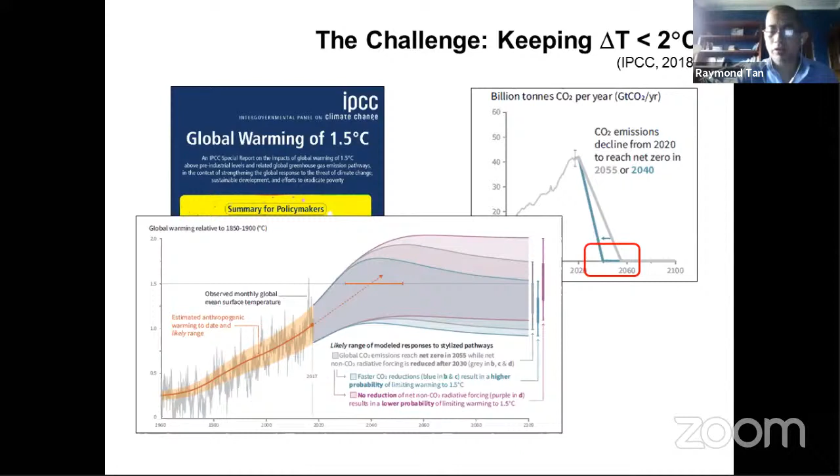It's such a major challenge that researchers, for example Haszeldine and colleagues, wrote a paper two years ago saying that these deep emissions cuts will only be possible with the large-scale use of carbon capture and storage technologies and carbon dioxide removal, as it's called by the IPCC, or negative emissions technologies. Essentially that means we would need to accelerate the commercialization of these technologies, which are still at pilot plant or lab scale, or even just conceptual scale as we speak now.

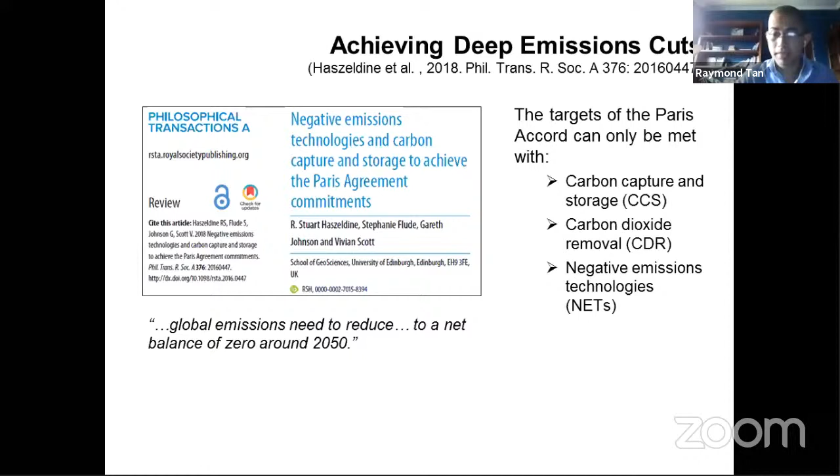What we actually need to stabilize climate is to go in the opposite direction, to get to zero by 2050. It stands to reason that rather than assuming there's one silver bullet that will allow this drastic cut to be achieved, it's probably more realistic to assume we would need to pick different technologies and maximize their use, getting cumulative emissions reductions by combining all of them wherever suitable, based on geographic or economic conditions. With optimal deployment of technologies like CCS, energy efficiency enhancements in industry, buildings and houses, improvement of fuel efficiency, and negative emissions technologies, all put together they can potentially be scaled up to achieve zero emissions by 2050.

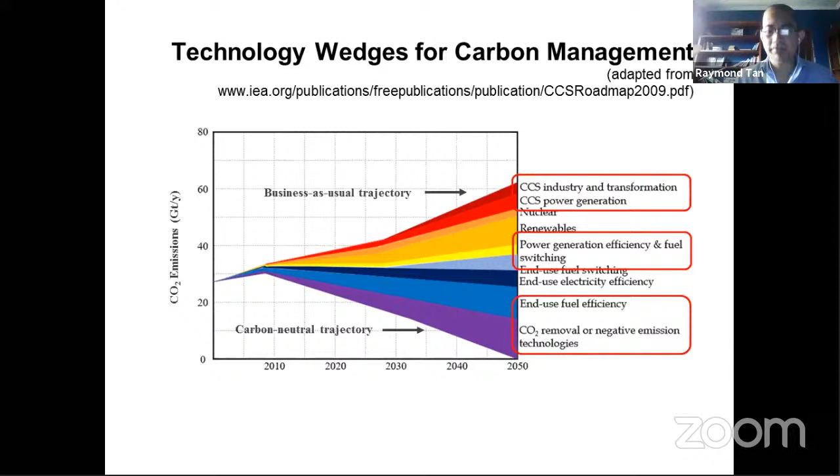All right, so that is the background as far as climate change is concerned. I'm going to talk about carbon emissions pinch analysis, or CEPA. This is a modeling framework for optimal carbon-constrained allocation of energy streams, matching them with different energy demands or energy sinks, given that each of the sinks will have carbon constraints.

This is a modeling framework that can be applied at different scales, ranging from an industrial plant to an entire country, or even a cluster of countries like the EU or Southeast Asia. And I will stress one thing: CEPA is a modeling framework. This is best explained by referring, for example, to the SEIR models, which have become very popular nowadays in pandemic modeling. There is a difference between a modeling framework, which is like a template for computations, as opposed to a specific working model.

What you do is, if you have a modeling framework, you start populating it with numerical values of case-specific coefficients, and then you have a working model. So what CEPA actually is, is a modeling framework, and you can use it in different contexts by just using the appropriate numbers. So this is more about how to calculate rather than the specific results of the calculations.

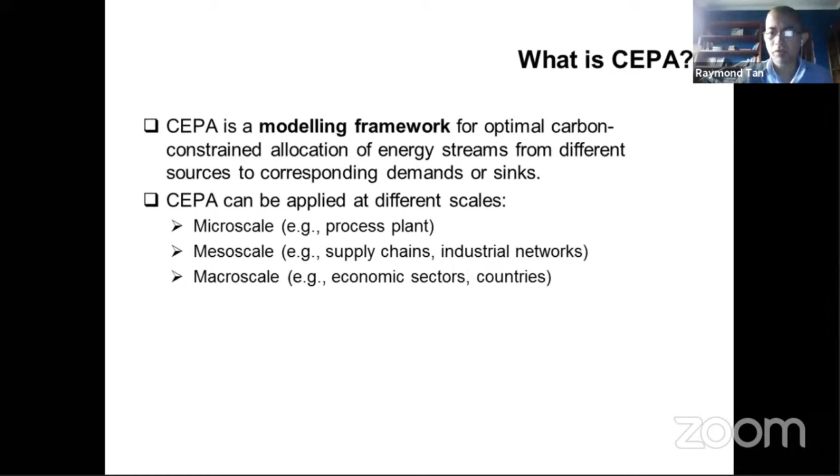The genesis of CEPA can be traced back to chemical engineering. I am a chemical engineer by training, and one thing I was never taught back in my university days is something I can say in just a few seconds: chemical engineering is engineering for the mass production of chemicals. That is the fundamental problem we all face. Chemical engineering is called engineering simply because the problem of mass production involves not just forming a specific molecule, which is your product.

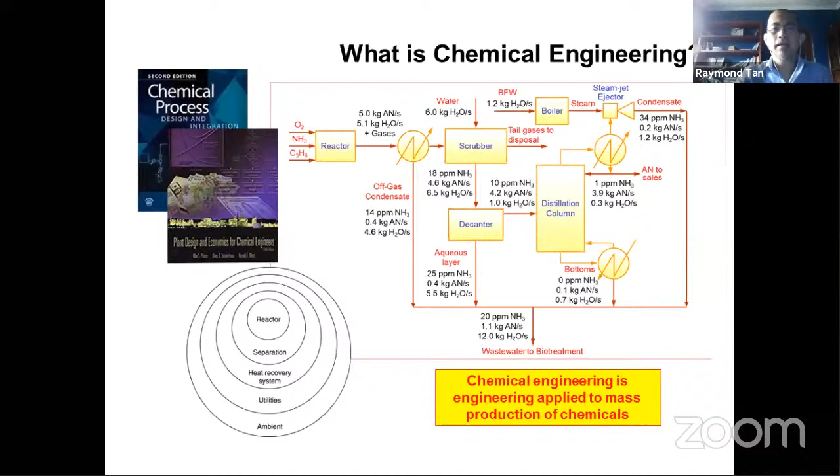Think, for example, if you're making ethanol. When you mass produce, it's also essential that you have all of these purification steps, because you need to purify the product to a certain level of quality required by the market. And when you have all of these purification steps, you have what are called utilities, because you need energy and water to ensure these various preliminary steps at the core of the process are able to be done on a large scale. So energy is a major factor in industrial plants, as is the use of water streams and such. Because of the need for utilities, one branch of chemical engineering known as process integration emerged back in the 1970s.

For those of you old enough to have been alive back in the 1970s, one of the major changes was there were a couple of energy crises, one in 1973 and the other in 1979. There was a sudden jump in the global price of energy, which acted as impetus for industrial plants and energy intensive companies to look for ways to economize on a major business cost, which is fuel cost. So process integration was a branch of chemical engineering dedicated to developing design tools or algorithms to allow companies to either build more efficient plants or modify existing plants so they consume less fuel. This was in the 1970s.

In the ensuing decades, there's been plenty of progress towards applying those same principles. If you can save on fuel, just by modifying those principles, you could potentially save on other things your plants need, whether it's water, solvents, or even some people have used these principles for optimizing the flow of financial resources.

In process integration, the major methodologies which emerged were initially seen as being competitors. One is pinch analysis, which is based on the use of insights and simple graphical displays, similar to what economists would use for reasoning. On the other hand, you'd have groups working with mathematical programming, which are equation-based models, which once you get to tens of thousands of equations, might actually be quite black box in nature. Fortunately, in recent years, these two schools of thought have made friends with each other, and there's been more synergy in the research community.

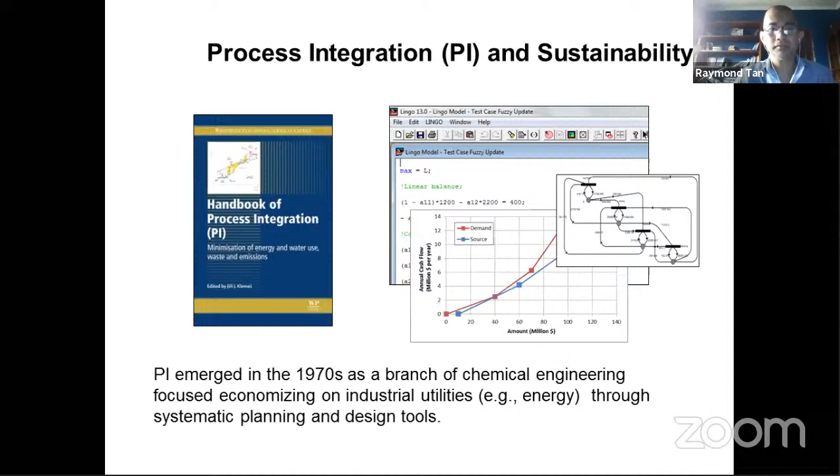Now, in pinch analysis specifically, the general roadmap is we begin with what is known as a process flow diagram, which is a schematic representation of an industrial plant. Pinch analysts would extract highlights of the data that are needed. For example, if you're dealing with energy conservation, you would probably need temperature data and enthalpy data.

And we construct what are known as composite curves, which summarize the cumulative demands of energy and cumulative supply that are available inside the plant. The pinch analysis procedure culminates in what is called network design.

In other words, you then map out if there are pockets of excess energy in the industrial plant. These are matched with the appropriate pockets of energy demands internally, because if you can use waste energy available in your plant to supply demands inside the plant, you can buy less fuel and you would in fact save on costs. You would actually reduce emissions. This was recognized back in the early 90s, that there's a link between emissions reduction and fuel consumption reduction.

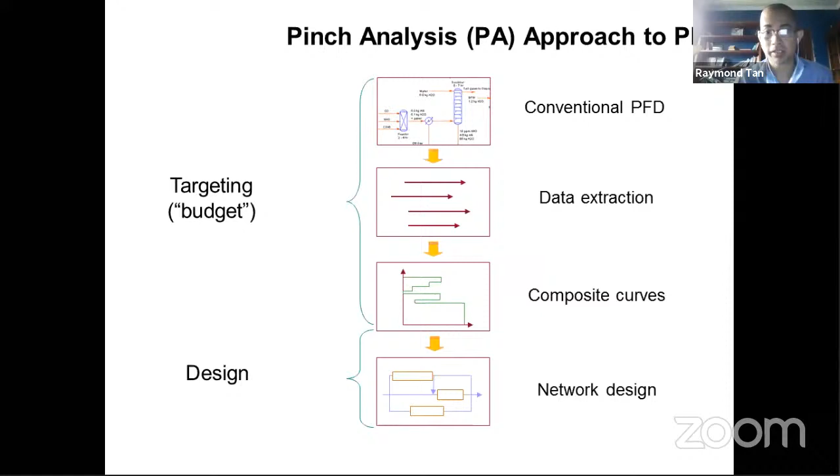What we did essentially in our article, which has also been rehashed in the Handbook of Process Integration and in encyclopedias, is we've taken the general principles of pinch analysis, and instead of applying them to energy conservation, we applied them to a specific problem of matching energy sources with energy demands based on carbon emissions considerations.

We never really thought, between the two of us, that it would get this big 15 years later. The seminal paper has been cited over 200 times. Those papers which cited us have cumulatively had about 5,000 citations and growing by the day.

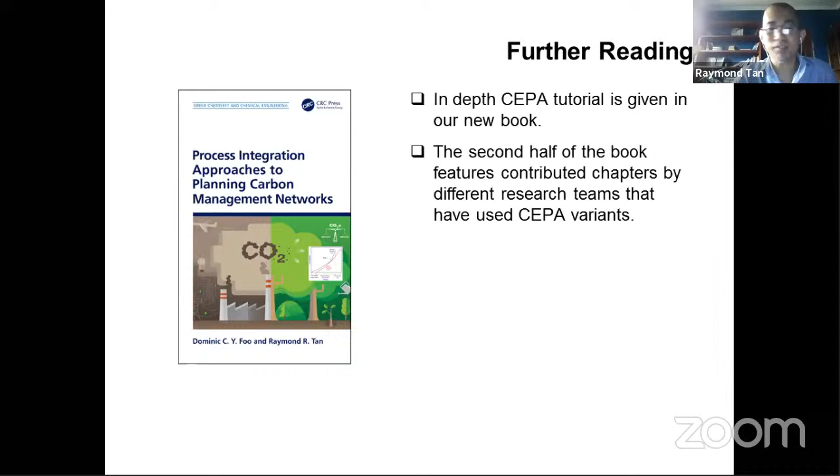At the demand side, we would have similar data: how much does each of the sinks require in terms of energy, and does it have a carbon emissions cap? Based on this information, we would then match the sources in the sinks.

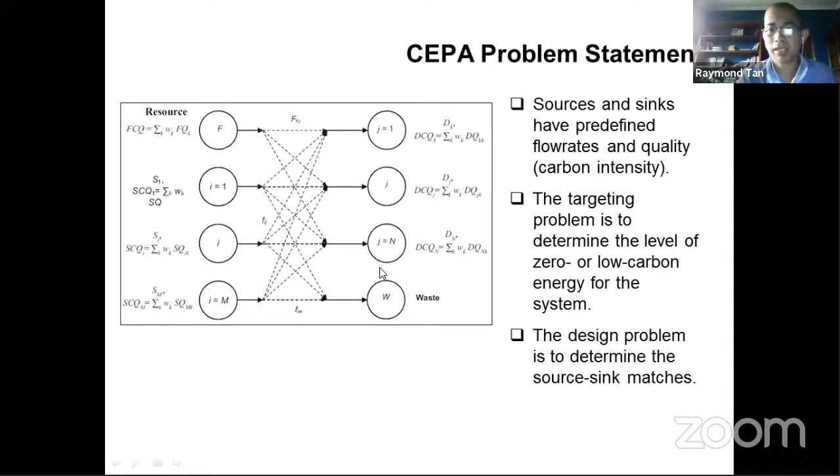Typically in pinch analysis, we would have what we call the fresh resource. That means there's a very clean energy source which is potentially available, let's say solar energy or wind energy. But what you're trying to do is make the most of what's already existing as energy sources, while satisfying all of the demands in terms of energy flow and in terms of carbon caps. So that is the fundamental problem.

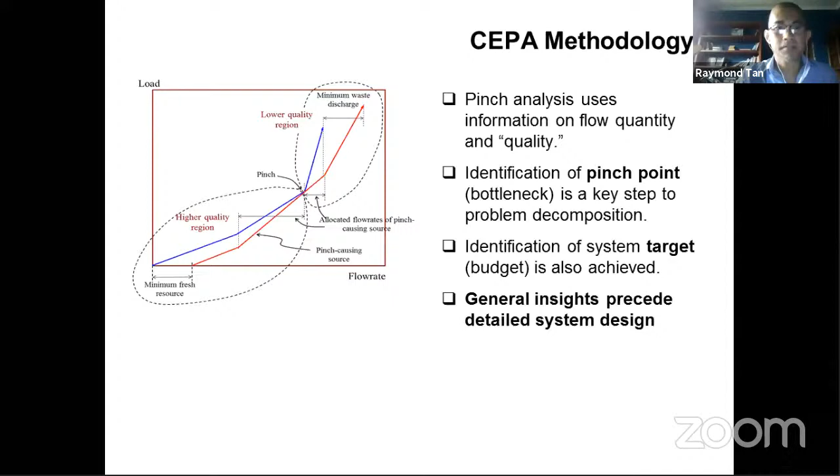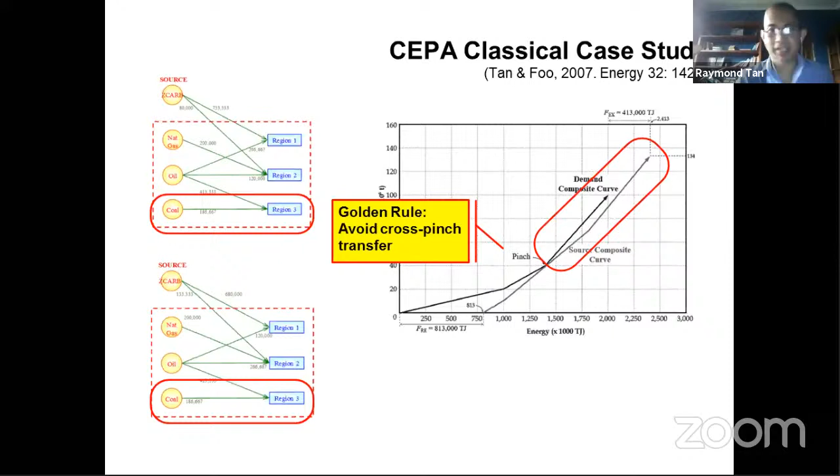So that is the golden rule of pinch, and that is what CEPA does. The same procedure, the graphical display, is very useful for discussion, education, and communication purposes, but we've actually taken up these same principles and implemented them as an algebraic algorithm and as a mathematical program in subsequent papers published a little bit more than a decade ago.

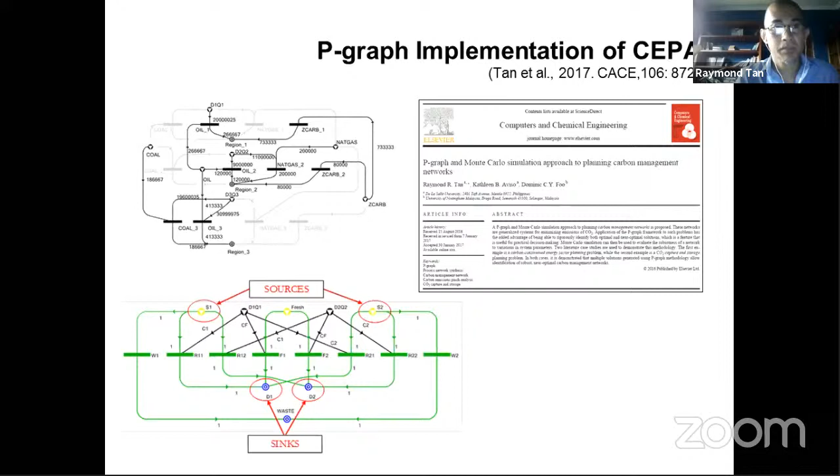We've also much more recently used process graph algorithms to implement carbon emissions pinch analysis with some interesting results. We've also applied exactly the same principles, but measured how sustainable an energy source is, typically using carbon emissions, though you could use other metrics as well, like land footprint, water footprint, and others. So applying pinch principles but replacing carbon footprint with some other footprint appears to work.

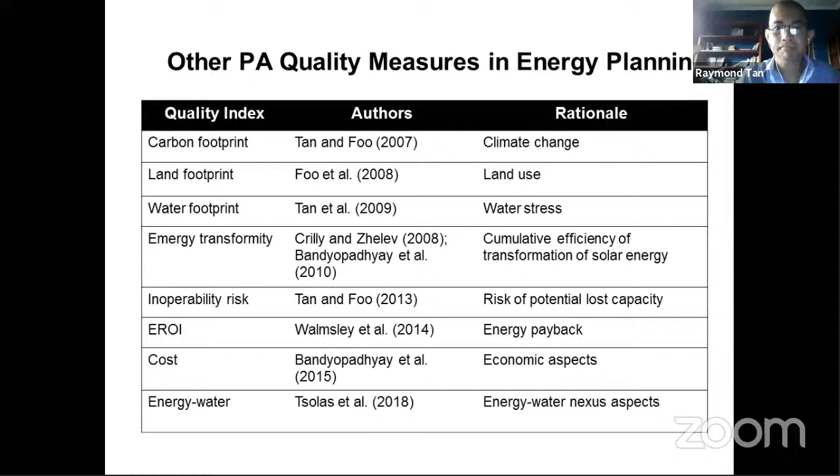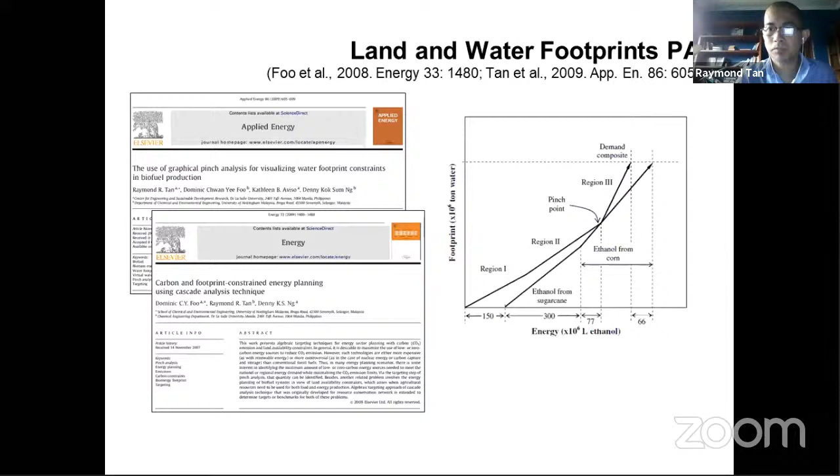We've done it, for example, about 12 or 13 years ago, at the height of the biofuel mania that took over the world for some time. We did this for land footprint and water footprint, which are constraints for the production of biofuels.

Much more recently, we decided we could actually approximate sustainability with a composite index, using a weighted average index of different sustainability measures within pinch analysis. This was selected as the best paper by the editors of Clean Technologies and Environmental Policy three years ago.

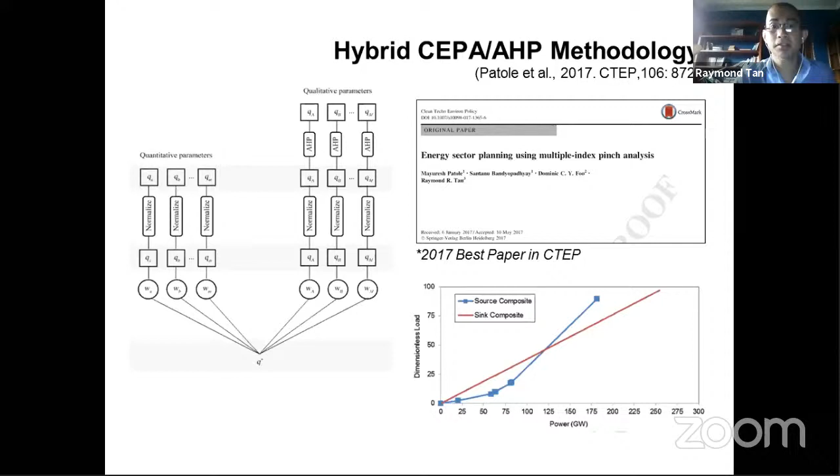Right, the next thing I'll do is give a brief overview of global CEPA literature.

These are some of the papers I have not been involved in, but have been done by researchers in different countries. Just one year after the initial publication of our paper, at a conference, Dominic and I found out that there was a PhD student in Ireland presenting at the same conference, who'd taken up our algorithm as part of his PhD thesis - Damien Crilly did that. At the same event, I ran into a postdoc named Martin Atkins, who struck up a conversation with me about pinch analysis, and they came up with their own analysis of New Zealand's low carbon future using this technique.

And of course colleagues in the US, China, Brazil, India - these are very large countries which would figure prominently in the global carbon footprint of the future. Much more recently, research teams in Korea, Nigeria, the Baltic states, and earlier this year, a paper came out in the Journal of Cleaner Production doing this for the entire EU.

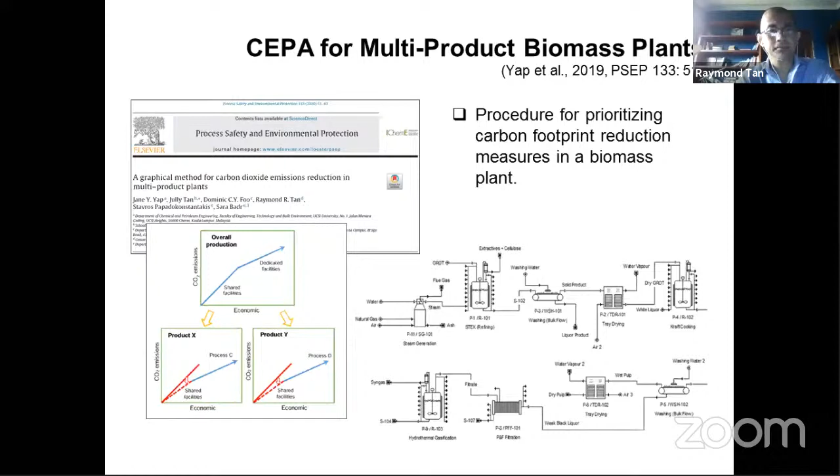Next, much more recent work done by PhD student Rok Gomilšek and colleague Dr. Lidia Čuček and a research team from University of Maribor in Slovenia. Rok is actually employed by the largest aluminum producer in Slovenia. As part of his PhD work, we've started an analysis of how to reduce the carbon footprint of aluminum products.

If you're familiar with the procedure for production of primary aluminum, it is primarily an electrolytic process. That means you use electricity to break down the aluminum oxide molecule, and you get, on one hand, the oxygen, and then of course the metallic aluminum. This is extremely energy intensive.

It is possible in the EU, especially for energy intensive industries like this, that you can select where you purchase your electricity, so a company can certify reductions in carbon footprint by selectively buying electricity that is certified to be renewable or low carbon. Except this will be more expensive, so the problem is how do you reduce the carbon emissions, the carbon footprint of your aluminum product while meeting budget constraints as well. This is interesting work which is still developing as Rok progresses through his PhD.

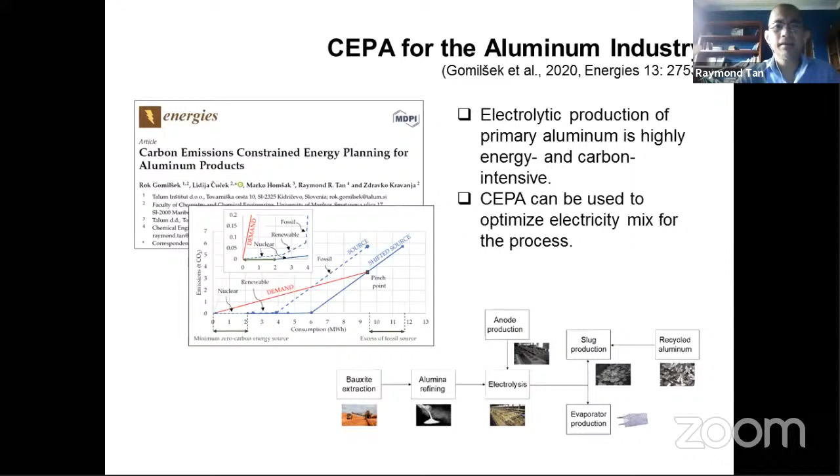In terms of the global scale, 2 years ago I did some work with a research team based primarily in the Czech Republic, led by Dr. Tim Walmsley, who's now back at the University of Waikato in New Zealand. We were interested in looking at a concept called circular economy, which is very popular nowadays. It deals with closing the loop at grand scales so we use resources more efficiently. Our idea, primarily Tim's idea, was how do we use pinch analysis principles so we're able to plan these circular economies more effectively.

We looked at the case of biomass-based systems like pulp and paper manufacture, which have plenty of residues with potential to be used either as fuels themselves or as feedstocks to make green fuels. We looked specifically at using residual biomass from the pulp and paper industry, how much is available on a global scale, and hypothetically looked at the potential to scale up production of green aviation fuel derived from these residues.

We looked at aviation specifically because of its inherent decarbonization constraints. It's highly plausible that within the next quarter century, we're going to have a dramatic drop in the number of fossil fuel or internal combustion engine vehicles. It's plausible the next car I buy might be a hybrid or pure electric vehicle, and there are countries in the EU, and formerly in the EU, planning to phase out gasoline or diesel powered cars in the near future. So when it comes to ground-based transport, there's potential for very deep electrification and decarbonization.

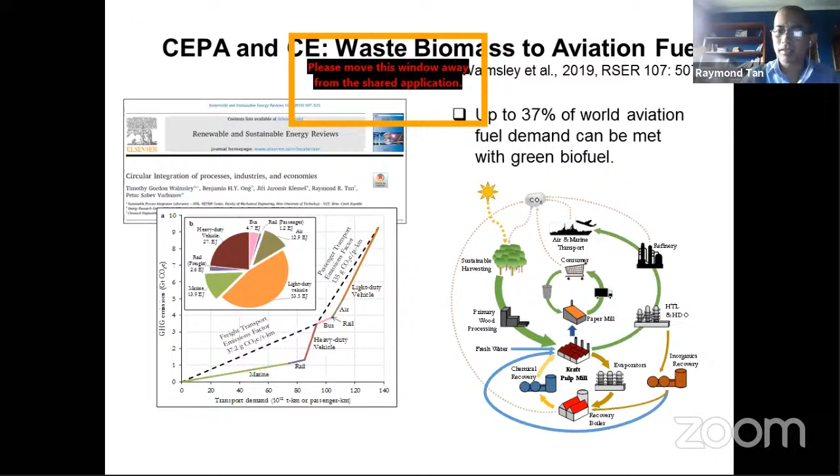Whether this can be achieved remains to be seen, but I think one lesson we can take from pinch analysis is it's important to know what your budget is. In other words, it's important to recognize the theoretical limit you can aspire for, whether cutting carbon emissions or cutting carbon, land, or water footprint. That theoretical limit acts as a guide for all decisions made later, once you get to detailed planning and detailed design.

I'll move towards the end of this talk by discussing some current work in progress, which I opted not to present in detail. Dominic Foo and I have been involved with a colleague from the UK, at the University of Nottingham, analyzing the feasibility of the UK's zero carbon emissions target by the middle of this century. That manuscript has been submitted to a journal and is under peer review.

There's also work I'm doing with a local colleague, Dr. Neil Lopez, and with Dominic as well, looking at electricity trading in Southeast Asia. This is interesting work which will be presented at a conference a couple of months from now. Maybe a future webinar can be done based on that.

Much more recently, Dominic Foo recruited a PhD student to work on analyzing how negative emissions technologies can be integrated within the procedure, because some recent work has shown that a lot of the deep emissions cuts we're looking at cannot be achieved unless we have negative emissions as part of the global energy economy.

I also mentioned there's work I'm doing with colleagues in Slovenia looking at the circular economy of the aluminum industry. And my current pet project, I'd be happy to work with anyone interested in game theory, on how we link pinch analysis with game theory to allocate carbon emissions caps to different countries or regions.